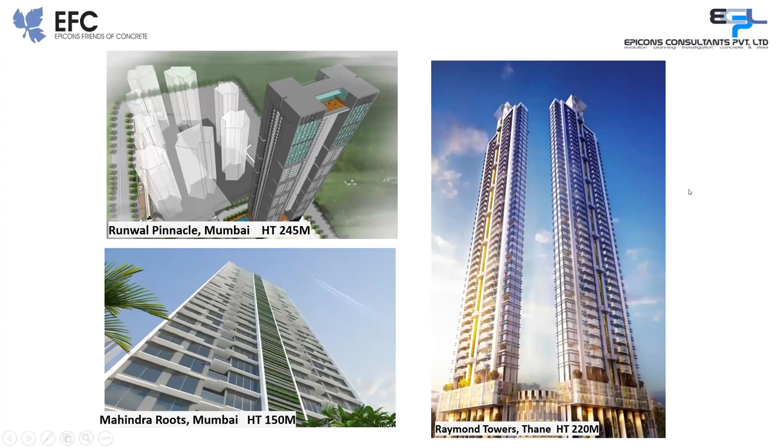He is involved in design of more than 75 tall structures ranging from 100 meter to 250 meter height for leading developers. He is a member of American Concrete Institute. These are glimpses of his projects: Runwal Pinnacle, Mumbai; Mahindra Roots, Mumbai; Raymond Towers, Thane.

Our second moderator, Engineer Arvind Parulekar. He is BE Civil from SPC, Mumbai University in 1987. Further, he pursued Masters from MS University, Vadodara in 1990. He is working with Epicons Consultants since 1989.

He is Director at Epicons Consultant, handling NDT and Structural Assessment Department. He has conducted training programs on NDT for PWD MERI Nashik, ISSE Mumbai, PWD Mumbai and Thane, CIDCO Navi Mumbai, and of course many webinars of EFC.

He was appointed auditor by RMCMA for RMC 2010 and 12. He worked on more than 2,500 projects, including structural assessment projects, large volume NDT projects, complex challenging structural design projects, and infra projects. Recently, he has completed the large industrial complex assessment at Philippines. He has developed an in-house well-equipped NABL accredited lab with a team of 35 engineers and technicians.

Now I request Parulekar sir to give the preamble.

Good afternoon, friends. Welcome to webinar 143, Earthquake Resistant Designs of High-Rise Structures: Modeling, Analysis and Design, by Professor Dr. Yogendra Singh, in which he will also have special emphasis on buildings with vertical irregularities.

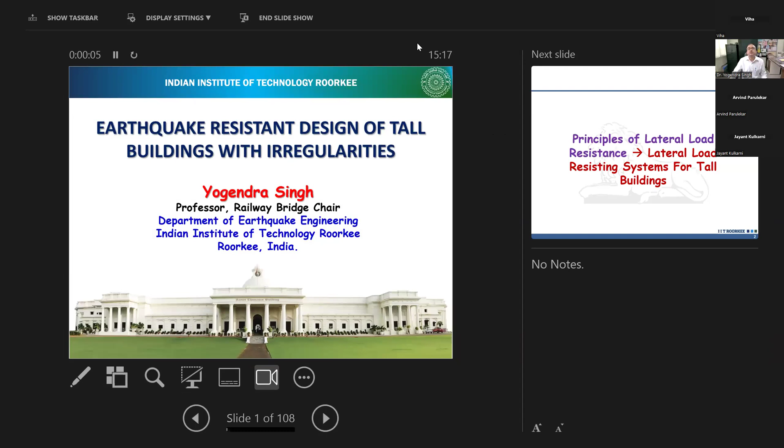Yeah, so it should be clear now.

As Mr. Parulekar has introduced, today we will talk about earthquake resistant design of tall buildings, with focus on irregularities. So the common irregularities, mostly vertical irregularities, and also some of the common irregularities which we are struggling with most of the time in actual design.

Our code defines an irregularity in terms of mode shapes, where we have to satisfy some criteria regarding the periods. We will also talk about that.

I will also talk about torsional irregularity a little bit, and floating columns, which is considered to be a big problem. In many cases, we have to provide floating columns or floating walls. And what should we do in such cases?

And also the infills, the masonry infills, those are always present in our buildings in India, and we are always worried about whether those are causing any stiffness or strength irregularity.

So before starting, I want to talk a little about principles of lateral load resistance. Buildings are subjected to vertical load, dead load and live load, and lateral load, that is wind load and earthquake load. Vertical load we encounter during our day-to-day life, and we understand the behavior of the buildings mostly under vertical load.

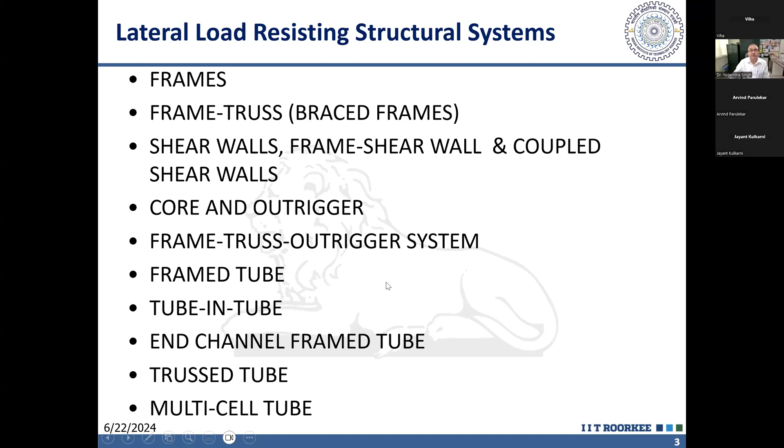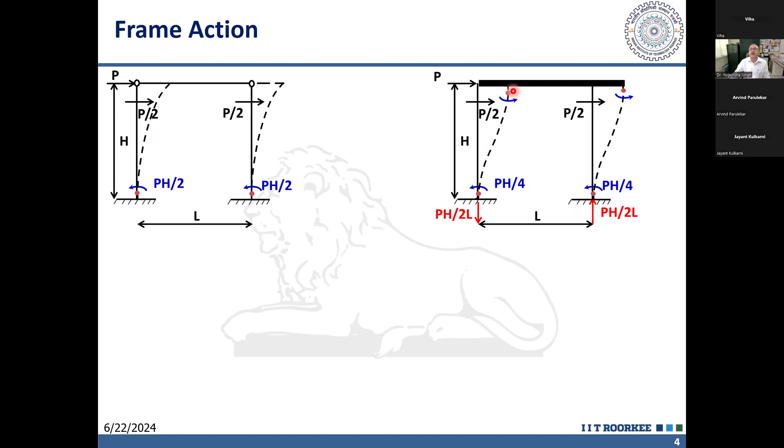Connection between the beam and column here is made by making the beam infinitely rigid. But in real practice, we can't have the beam infinitely rigid. So the beam is also deforming, and due to this deformation of the beam, the bending moment in the column is not PH by 4, it is more than that. It is somewhere in between.

These two cases represent extremes. Real frames with real beams and columns are somewhere between these two extremes. The moment reduces, and part of the force is resisted through overturning.

So one of the columns is subjected to compression, another column is subjected to tension, and similarly in the real frame also there will be some reaction. That reaction will be less than PH by 2L, but still some compressive force and tensile force will develop in the columns, and as a result this system will be able to resist more force, because part of the force is being resisted through axial action.

And from our day-to-day experience, we know any member is more strong, and not only strong, more stiff also, in axial action than in bending action. As a result, the rigid jointed frame is a more efficient system in terms of stiffness as well as strength.

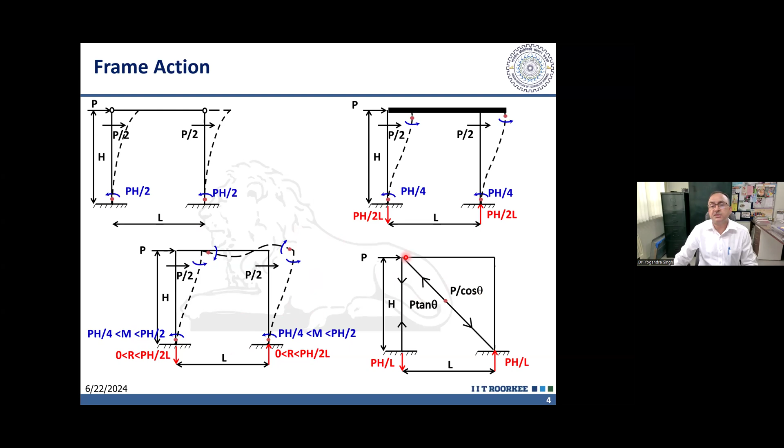Now we can further improve the stiffness and strength of the system by providing a brace here, a diagonal member. So when we provide this diagonal member, then this behaves like a truss, and all the force is transmitted through axial forces, or I can say that most of the force is transmitted through axial forces.

So even if this beam to column junction is rigid, very little moment is transferred to the beam, and from equilibrium, little moment is transferred to the column, and almost all the force is transmitted through axial action, and the performance improves further. Although the strength and stiffness of the braced frame increases, its ductility is reduced.

So we have to understand that the members, whether RCC or steel, are much more ductile in bending, but those are not ductile in axial action. That happens in case of steel also, and that happens in case of RCC also.

In steel, the problem is buckling, because when this member yields in compression, we have to understand that earthquake force is much larger than the capacity; whatever structure we are designing, the earthquake force it will attract will be much more than its capacity, and as a result it has to yield.

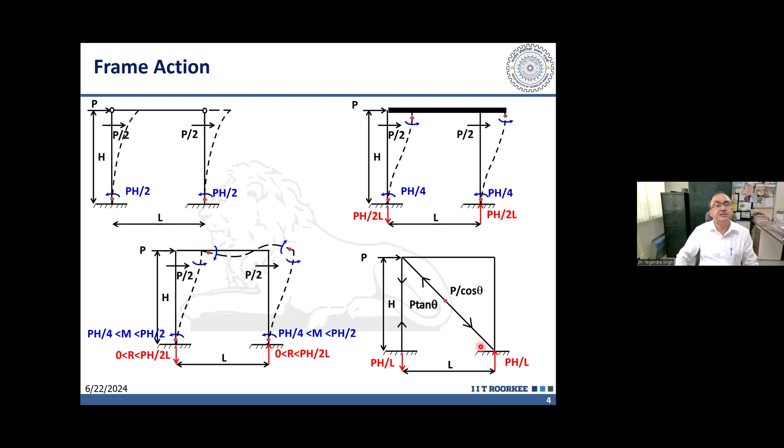And when this brace yields in compression, it buckles. As a result, if we compare the load displacement curve of these two systems, one is the rigid jointed moment frame, another one is the brace frame.

So in the moment frame, we can see that strength, stiffness as well as ductility we get. Whereas in case of a brace frame, especially in compression, when the buckling starts, just at the yielding, the buckling starts. Even if we have designed this brace member with the L/r ratio within the limits, so slenderness is controlled, even then when it will yield, its effective modulus of elasticity, the tangent modulus, will be zero.

And because of that it will buckle. Its buckling load will drop, and as a result you can see that just at yielding it will suddenly lose its strength, and as a result its ductility will reduce.

So to combine the ductility and stiffness of the brace frame with the moment resisting frame, we have eccentrically braced frames where we combine the two. That can be done in case of steel structures.

In case of RCC structures, if I have to enhance the capacity of a frame, I can do that by replacing the columns with a wall. So what we are doing with the same material, same amount of concrete which I was putting in these columns, which may be square or rectangle, I put in an elongated shape.

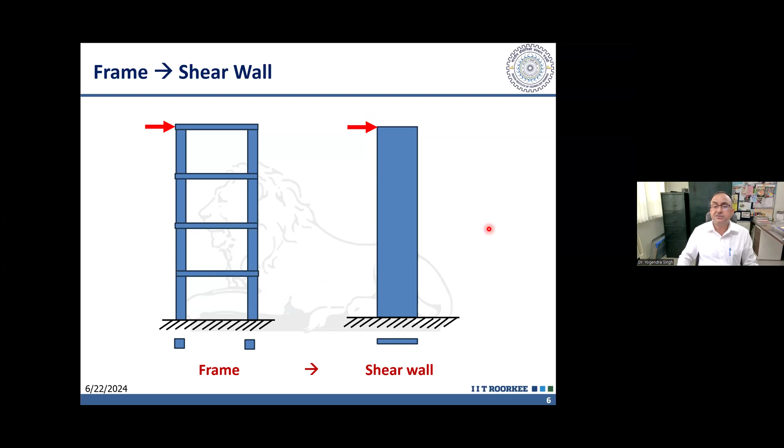Now, when we are using frames and shear walls together, we have to be careful. There is a difference in the deformed shape of the frame and the shear wall. The frame deforms like what we call a shear beam.

So actually this deformed shape is that of a shear beam. And because of the lateral load, the shear force goes on increasing. The story shear in the top story is the lowest, and as we go down towards the base, shear is maximum, and as a result the slope at the bottom is maximum, and as we go up the slope goes on decreasing, and in the top story it becomes almost zero.

On the other hand, in case of a shear wall, it behaves like a cantilever beam, flexural action. So the moment at the base is maximum, but the slope is zero because of the boundary condition. So we get the maximum curvature, zero slope, and that curvature goes on accumulating along the height. So if we integrate that curvature, putting the boundary conditions of slope equal to zero, we can see that the slope at the base will be zero, but the slope goes on increasing along the top.

So in case of shear wall, the maximum slope will occur at the top, whereas in case of a frame, the interstory drift will be minimum at the top.

And when we combine these two, we can see that there is a push and pull between these two systems. In the bottom portion, the shear wall is supporting the frame, and in the top portion, the frame is supporting the shear wall. Due to that, there is a complex interaction, a change in the forces, which is known as frame shear wall interaction.

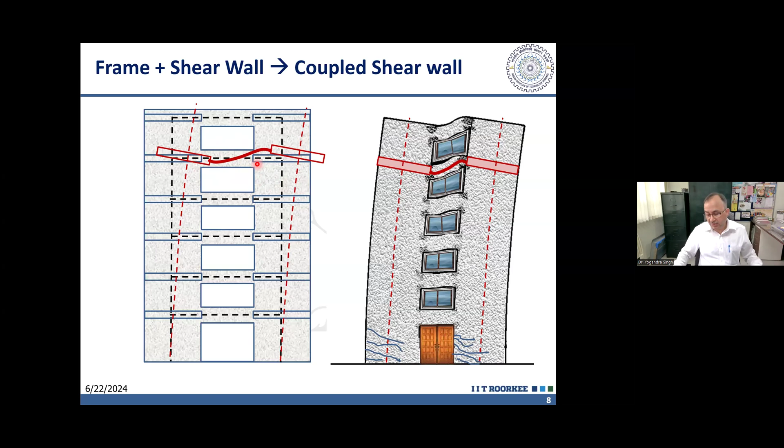So we want any RCC member to yield in flexure as far as possible. But in case of coupling beams, if we make these beams too slender, we will not get the advantage of stiffness of these two shear walls. And if we make them deeper, as generally we do, these deep beams will act as short beams and failure will occur in shear. So we have to be careful that these beams are designed for very high shear, and that's why the code has the requirement of providing diagonal reinforcement in the coupling beams.

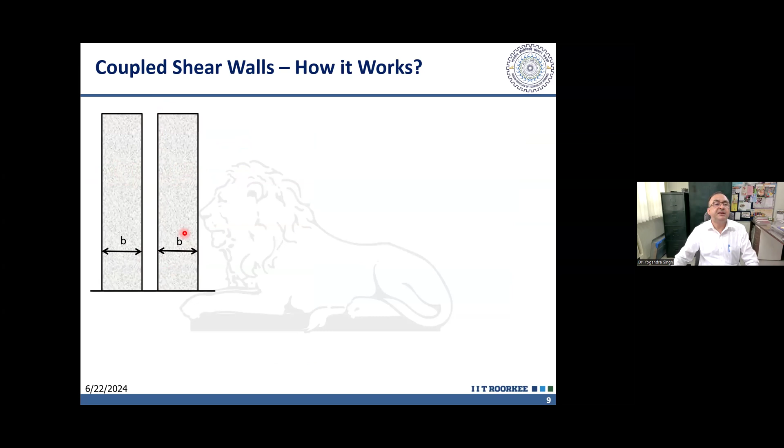So how does the shear wall work? We can think of the shear wall as two shear walls. If these two shear walls are fully separated, with the beams between them either absent or very slender, they will act as independent walls, and the total moment of inertia will be the sum of the moment of inertia of these two shear walls. This will be 2 into T B cubed by 12, where T is the thickness and B is this length. So this will be 2 times the moment of inertia of the individual walls.

Now imagine I join these two shear walls together, somehow welding them at this junction. Then this will act as one shear wall, and the moment of inertia will be T into the cube of 2B divided by 12. That becomes 4 by 6 T B cubed — in other words, the moment of inertia, stiffness, or strength of these shear walls is going to increase 4 times.

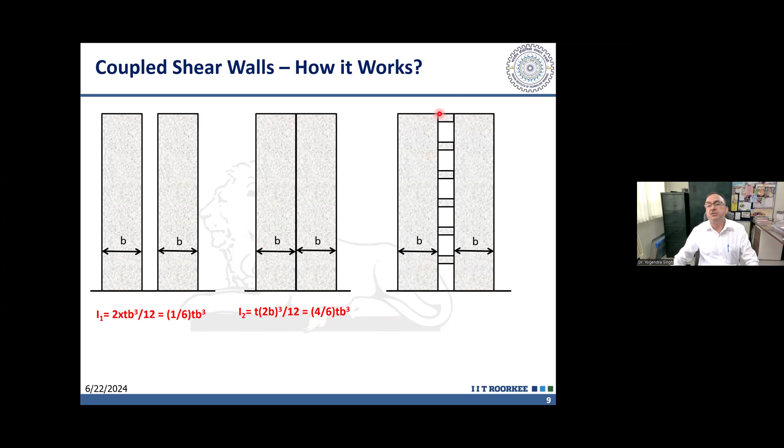Now, this type of connection is not possible, because in that case it will become one shear wall, and generally we need openings in between. So what we do is join these shear walls with coupling beams. When we join them with coupling beams, the behavior is somewhere between these two extremes — one extreme being fully separated, the other being connected together as one integral wall. This is somewhere in between, and how much interaction takes place between these two shear walls depends upon the stiffness of these beams.

If these beams are stiff and strong, there will be larger stiffness and strength of these shear walls, more than that of two shear walls put separately. We can see that the moment of inertia will be somewhere in between these two, and accordingly the stiffness and strength will also be in between. So this is another very important system which we are using, and most of our buildings in the mid-height range, 20 to 40 story buildings, mostly have this type of system.

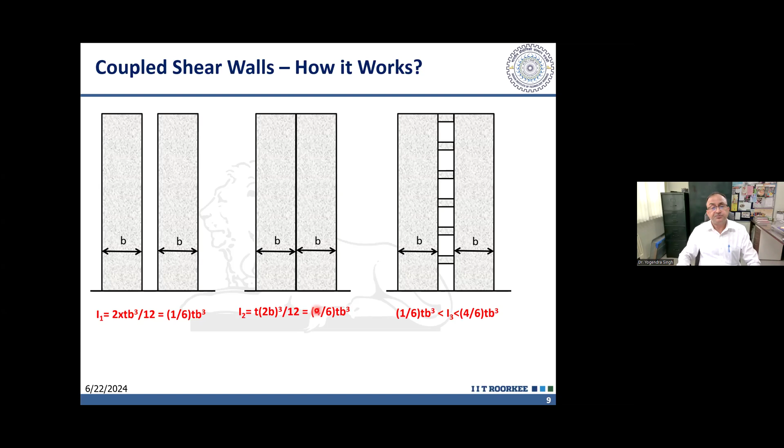Now, the performance can be further improved if we can transfer some bending action of the shear wall to the axial action of the column. And that we can do with what we call the core and outrigger system. So suppose I have a shear wall core at the center, and along the perimeter I have columns. If it is connected through slab, the slab is going to deform like this. Even if it is connected through slender beams, those beams will also deform like this. As a result, some axial force will develop in the columns, but that axial force will be limited.

If somehow I connect these shear walls to the columns through a rigid member at the top, then when the shear wall bends, the section which is perpendicular to its bending axis will rotate — it will try to compress the columns on one side, and it will try to extend them on the other.

It will try to put the column on the other side in tension. As a result, some overturning moment, which was resisted earlier by the shear wall alone, will also be resisted by these columns through axial action. And as we convert bending action to axial action, we discussed that it makes the system more efficient.

So we will be able to achieve higher strength and stiffness if we use this action. But we have to keep in mind that when we are subjecting the columns to high axial force, we are compromising their ductility, so their energy dissipation capacity is compromised. We have to ensure that the column should be strong enough, the column should not fail, and the energy dissipation should take place through beams and shear wall at the base.

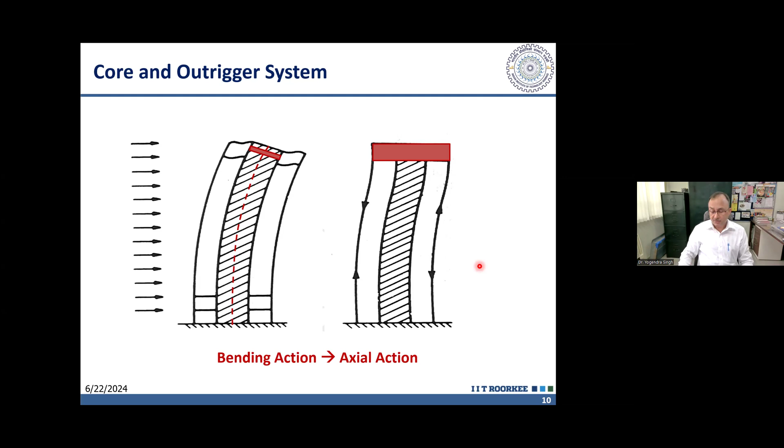Different types of these core and outrigger systems are possible, and some people have also used energy dissipation devices between this core and outrigger, because this core will be subjected to large bending, especially at the top. The rotation will be maximum, and due to that, there will be large relative displacement between the shear wall core and these perimeter columns. If we can put any energy dissipation device there, we can dissipate a lot of energy through this supplemental device. So this type of arrangement is also proposed. This is the most desirable location where we can put dampers for dissipating energy in case of a tall building.

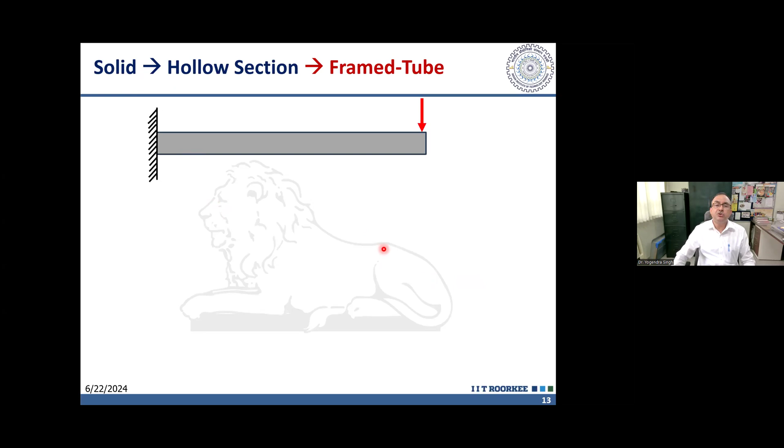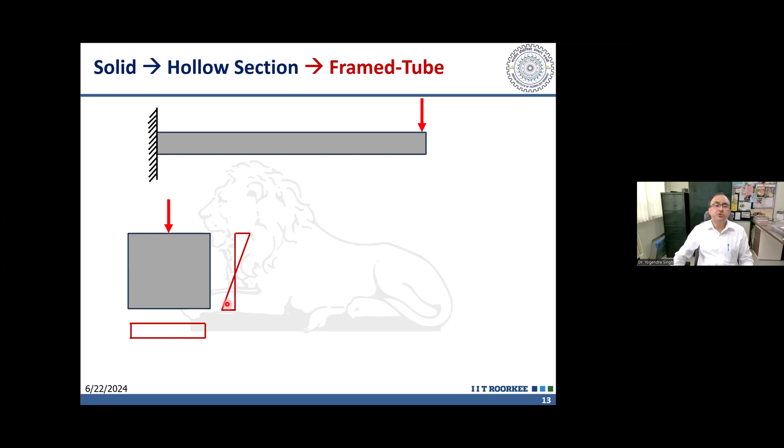Now, another principle which we use in enhancing lateral load resistance of our buildings is moving from a solid section to a hollow section. Suppose this is a cantilever beam. In one case, it is having a solid section and it is subjected to vertical load here in this direction. If I plot the distribution of the stresses, we know bending stresses are tensile at the top and compressive at the bottom, and those are increasing, varying linearly till the material has not yielded.

And in the linear range, this is going to be the distribution of the stresses. I can enhance the moment of inertia of this cantilever beam significantly by making a hollow section made of the same material, so the total amount of material or the area of the cross section remains the same. Only thing is that I have arranged that material in the form of a hollow tube. When I remove the material from the center and put it along the perimeter, its lateral load resistance increases significantly because the moment of inertia about this axis increases.

But along with this increase in the moment of inertia, there is also a problem because of the thin sections. Now, it is not a solid section, it is a tube where the webs and flanges are thin. There is a phenomena of shear lag, and due to that, this stress distribution, which was earlier linear, is no more linear. Rather, the stress near the corners is higher and it diminishes rapidly as we go towards the center.

So earlier it was varying linearly, now it is varying parabolically, and it reduces much faster. Similarly, on the compression and tension face, the stress was constant earlier — the bottom fiber or bottom face was having the same stress throughout. Here it will not remain the same throughout, again because of the phenomena of shear lag due to the thin section. So maximum stress will occur near the corners, and as we go towards the center, this stress is going to reduce. So we can enhance the capacity of a solid section by putting the material in the form of a tube. Its stiffness and strength is going to be enhanced, but we have to keep in mind that this phenomena of shear lag will take place. It will reduce its efficiency to some extent, but still it is having much more resistance than a solid section.

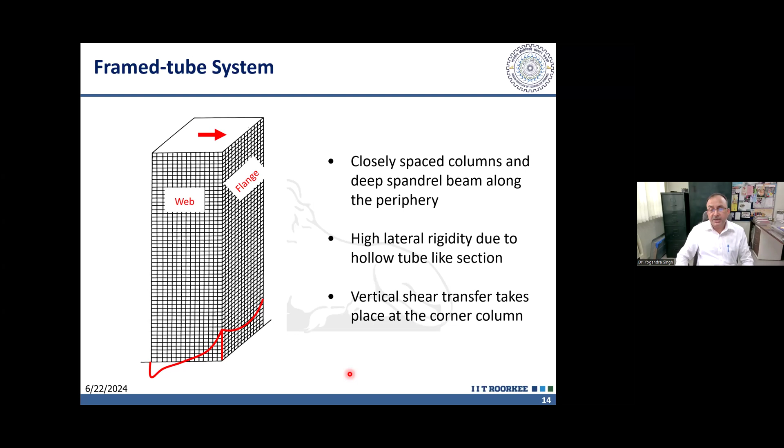So this shear lag phenomena reduces the efficiency of this frame tube system to some extent, but it is still a very effective system in RCC as well as steel buildings, and many past buildings have been constructed using this. Now we have to keep in mind that when we look at the structural systems of tall buildings constructed in the world, we see different structural systems have been used. It's not that any particular system has been used for all buildings - this frame tube has been used in many buildings, but not all. Other buildings have been constructed with other structural systems, which we will talk about too.

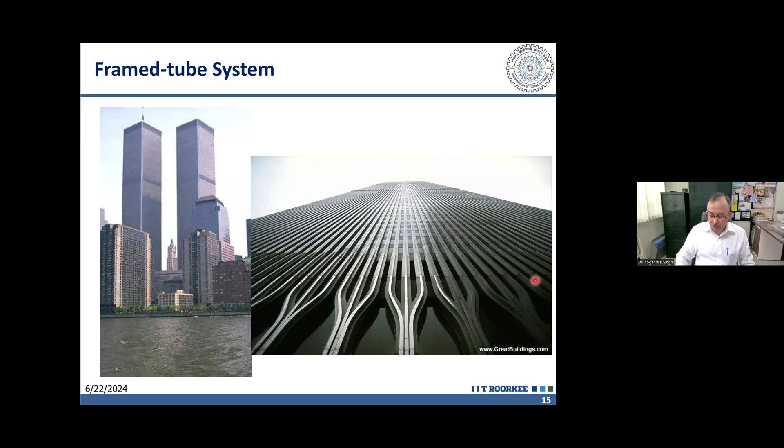So what we see here are the World Trade Center Twin Towers, which were destroyed in the terrorist attack, as all of us know. This was a steel tube - once upon a time the tallest building - made of steel tube. You can see closely spaced vertical columns connected by deep beams. At the bottom, because of architectural reasons, the spacing between columns was increased, columns were made much stronger, and a transfer girder was provided at that level. We will talk about the design of the transfer girder later.

Now another system, an improvement above the frame tube, where we provide a shear wall core. In a tall building, there will be a large service core, which will have all the services - staircase and elevators and lifts, not escalators. So we can have a large inner core housing all these services, constructed with shear wall, because such ventilation may not be needed as in the rest of the building.

So the outer tube may be made of frame tube, and the inner tube may be made of a shear wall. This system we call a tube-in-tube system, and it will have a behavior something similar to frame and shear wall.

So it is also a coupled system, and similar behavior, similar type of interaction between the inner core and the outer core we expect here. But a combination of the two makes this much stiffer, and we can go for larger heights.

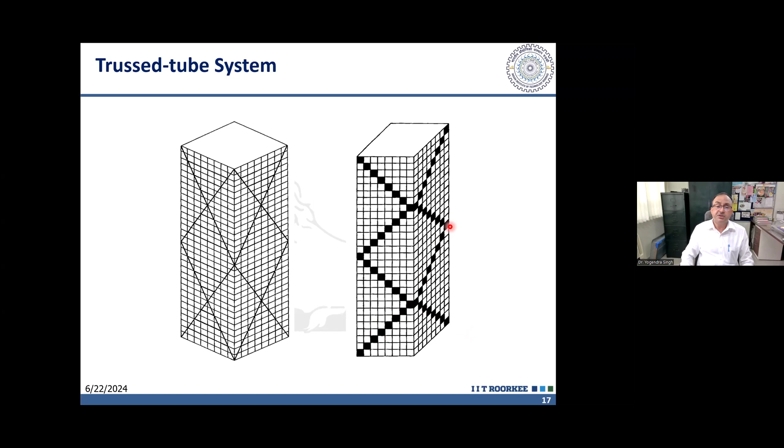Now, to minimize the effect of shear lag, another system called bundled tube or multi-cell tube is developed, where multiple tubes are bundled together. Or we can think of this as a frame tube having multiple bays.

So several bays are there, and due to that, at the intersection of the bay and the frame, along these columns the forces will increase almost to the same level as the corner columns. So here also the forces will increase, and shear lag will take place between these two columns, and due to that the efficiency of the system will increase.

So these different types of systems can be summarized like this, and this figure shows the tentative height range. As I said earlier, there is no rigid rule about the height that each system can go up to, but the height range in which different structural systems are economical is given in the textbook. I think I have taken this from B.S. Taranath's or maybe Fintel's handbook, I don't remember which of these two books.

So we can see that up to 10-15 stories we can have a semi-rigid frame. Then for taller buildings we can go for rigid frame, then braced frame. And you can see here these are not concentrically braced frames, these are eccentrically braced frames, because concentrically braced frames lack ductility, so eccentrically braced frames are preferred.

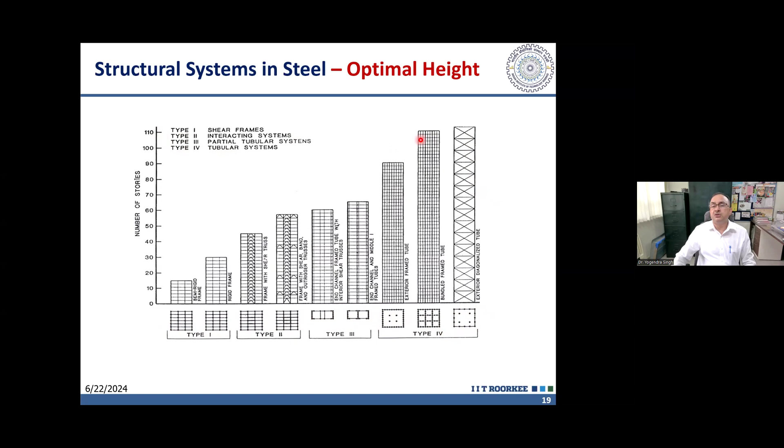Now, similarly, in case of RCC buildings, we have the rigid jointed frame. We can go theoretically up to 20 stories, but usually up to 10 stories. Beyond 10 stories it becomes difficult to satisfy the interstory drift.

Theoretically, it is possible to go as tall as we want. We have the frame and shear wall system, and the shear wall system alone. The frame-shear wall dual system is more efficient than the shear wall system alone, and it is suggested for up to 50 stories. Then we have frame tube and tube-in-tube systems, where the inner tube is made of shear wall core, along with modular tube, multi-cell tube, or bundled tube systems, where we can go even taller. These are the structural systems for RCC buildings, and we can see that efficiency increases, allowing us to go taller.

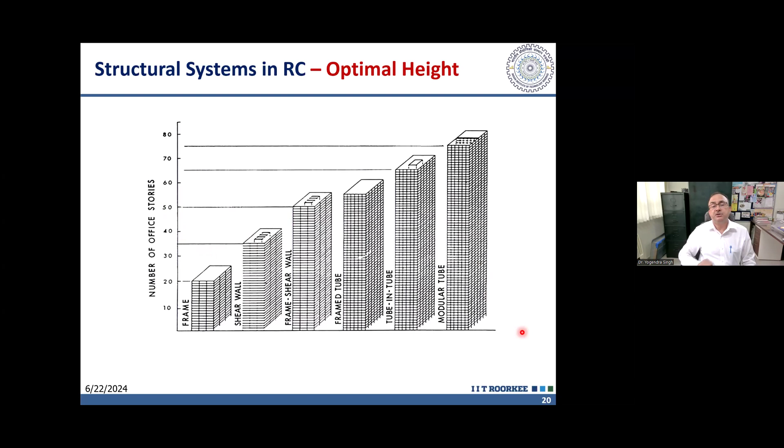But these limits are only tentative, defining which system is more efficient. It doesn't mean that if you choose a system that is less efficient, it may not be economical, but there is no limit stating these heights must be treated as absolute limits. But in our code, IS 16700, there are rigid limits.

That's why in zone 4 and 5, in tall buildings, frames are not allowed. But in zone 2 and 3, where earthquake forces are smaller, these are allowed, and up to 80 meters is allowed for frames alone - 80 meters, not 80 stories. The building is allowed to have frames alone up to that height.

When we have a well-distributed structural wall system, we know this is a more efficient system, so in zone 5 we can go up to 120 meters. If we have a structural wall plus moment frame, we can go higher, and the same is applicable to structural wall plus perimeter frame. Similar limits are given in our code for these combinations. But when we have a frame tube, that frame tube may have an inner tube.

The structural wall can be in the form of an inner tube, which is more desirable and common from the functional perspective. Otherwise, it can be a distributed shear wall along with the frame tube. The code allows up to a maximum height of 180 meters in zone 5, and up to 250 meters in zone 2.

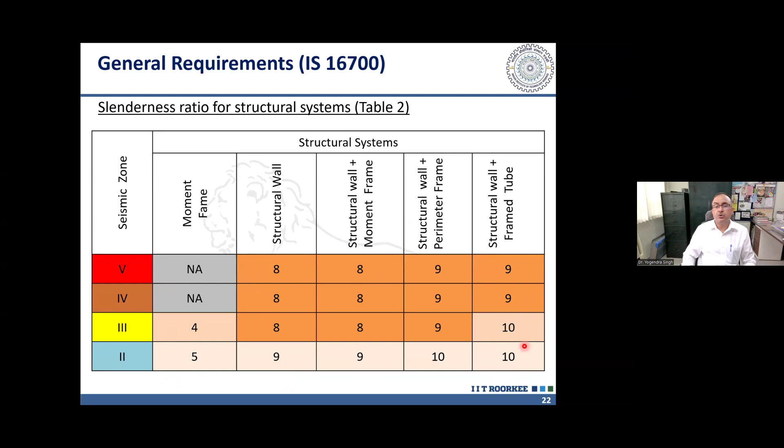But if we can provide proper design of the foundation, and check that our columns still have significant or desirable ductility, we can go beyond this limit. Such buildings we call code-exceeding buildings, and we can justify their design using appropriate methods, such as performance-based design or nonlinear analysis. Based on nonlinear analysis, if we can demonstrate the building's performance is okay, we can go beyond that as well.

Now the most common type of system which we have - somehow this black strip is coming on my screen. Is it coming on your screen also, or are you seeing it clearly? No, we are seeing it clearly. Okay.

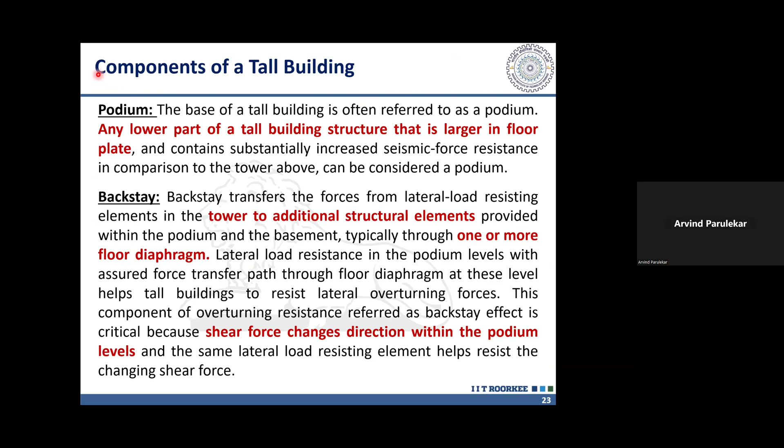Our common tall buildings constructed these days have a tower, a basement, and sometimes a podium above the basement. This podium is a larger structure at the base, and if there is a basement, we will have retaining walls. That makes it very rigid and creates the so-called backstay effect, causing the most common type of irregularity in our buildings, where the bottom is very stiff. Although it is not defined as irregularity, it poses challenges in analysis and design.

There can be a basement with a single tower or multiple towers, and the stiffness of the tower and the basement is very different. When we perform modal analysis or free vibration analysis, the initial modes do not have mass participation from the basement. As a result, you will not get 65% mass participation; it will be much less. If you want 65% or 90% mass participation, you have to consider a large number of modes, more than 200 or so, depending on the difference in stiffness between the two systems.

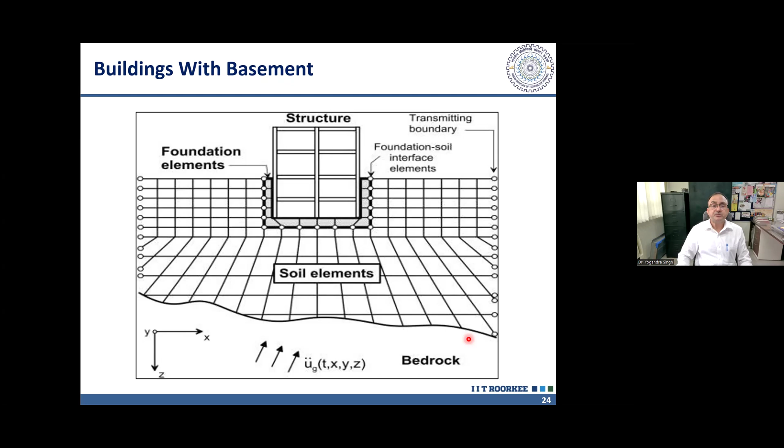So what we do is take into account the load part. When we have a podium with a shear wall, or a basement with retaining walls, these retaining walls also act as shear walls in plane and out of plane direction, subjected to earth pressure. This bottom portion becomes very rigid, and when the tower vibrates at the topmost level of this podium, it is subjected to reactions here. As a result, a large shear force gets transferred from the tower portion to the podium or basement portion, and this top slab, through which the shear force transfer takes place, we call the backstay.

And this phenomenon we call the backstay effect. This backstay effect changes the distribution of bending moment and shear force within the core.

If we look at the distribution of the load, this triangular load acting, let's say due to earthquake, increases linearly - actually in proportion to the mode shape, but let's assume linear increase. As a result, it gets transferred into the shear wall. At the top of the podium, where we have this backstay effect, the deformation becomes almost zero or reduces significantly. This is the deformed shape of the core or the tower, with maximum deformation at the top. Near the backstay, the displacement is almost zero because of the rigidity of the backstay.

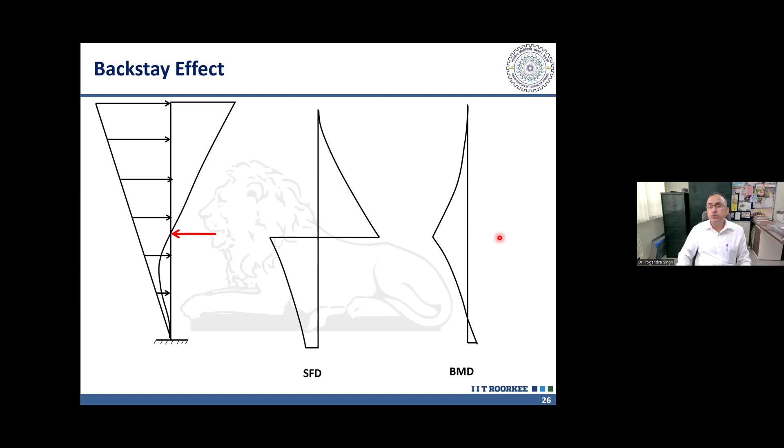So this phenomenon we have to properly simulate. Whichever model we are using should be able to simulate this. Two approaches are used for that, depending on the stiffness of this backstay and what rotational stiffness we are getting at the base. Our structural system can be idealized like a cantilever connected by a spring, and this spring represents the stiffness of the backstay. Depending upon the size of the retaining wall, this backstay stiffness can be anywhere between 0 to very large, close to infinity, where the displacement here is 0.

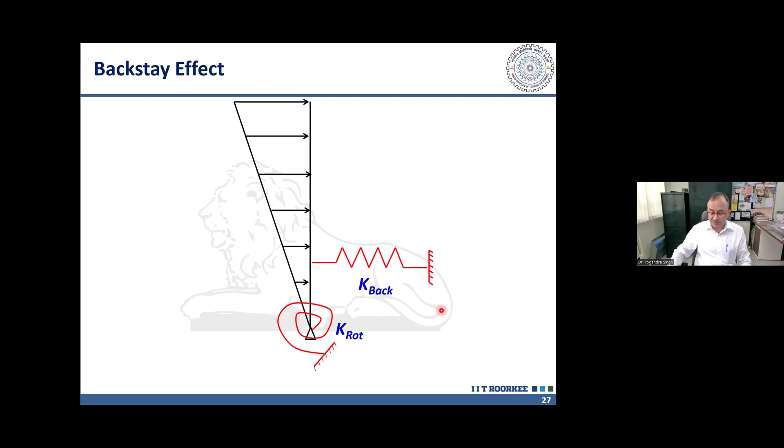And the rotational stiffness will be provided by the raft foundation present at the base of the basement, or the founding level. So this rotational stiffness will come from there. Depending on how much stiffness is mobilized through this backstay, the behavior of the structure will depend.

During large forces like earthquakes, the backstay slab, the top slab of the basement or podium, will yield locally, and due to that its stiffness is going to change. So estimation of the exact stiffness available during an earthquake is difficult, and that is why the code suggests a sensitivity analysis, where varying stiffness of the backstay are considered.

So two approaches to consider this effect, or modeling of tall buildings or the components of tall buildings, are there: one is the skeletal approach, and another is the continuum approach. Some of the members in tall buildings have distribution of mass along a line, which can be represented by a line. We call those the skeletal elements, and examples are beams, columns, braces, trusses, and in some cases shear walls.

I will explain that the shear wall can also be modeled as a skeletal element using a frame element, or using a line element, and we do the frame modeling using skeletal elements. On the other hand, we have different types of continuums, 2D and 3D. 2D continuums are those where the mass is distributed in two directions, like shear walls, slabs, and foundations.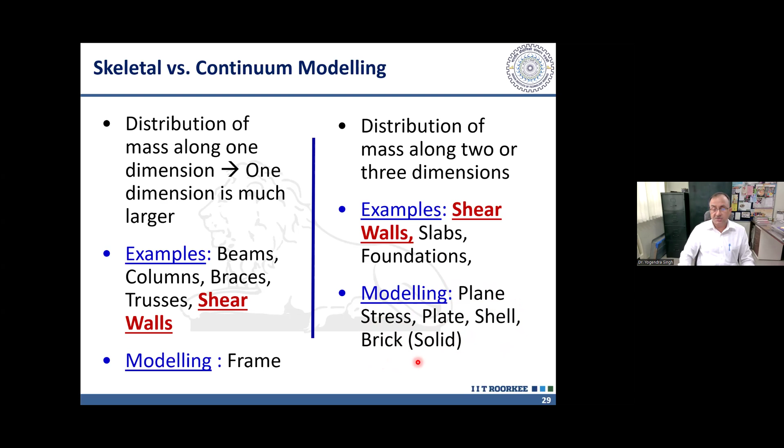So the web is represented by one frame member. The flanges are represented by separate members, and these members are interconnected through rigid elements. If we connect them rigid, then we can mobilize the action due to the C-shaped shear wall.

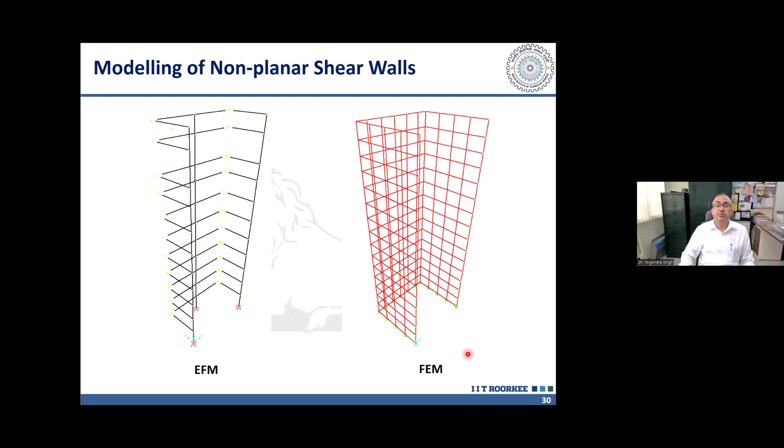That's why frame modeling, where we represent shear walls with a single column, a wide column, or multiple wide columns, is more desirable.

Here a frame element is shown for this shear wall core. We can see the shear wall consists of 2 C-shaped portions. We have RC walls here in the form of C-shape, and here in the form of C-shape, and then they are interconnected by coupling beams.

We can model this by frame elements, by providing one column here, one column in the center of this web, and another column here. So 3 columns represent one C-shape, and another 3 columns represent the other C-shape, and these are interconnected through beams.

These 3 columns will be interconnected by rigid elements. This black horizontal element I am showing is nothing but the rigid beam, so these columns will be interconnected by rigid beams, and in between they will be connected by the actual beam, the coupling beam. This thin line here is the actual beam, with the dimensions of the actually provided beam.

Those columns will be interconnected through rigid beams, meaning their stiffness is much higher than normal beams. If the stiffness of these beams is at least 100 times that of the actual beams, if we provide stiffness 100 to 1000 times, the purpose is served. We cannot provide stiffness lesser than 100 times, because then this will not behave as rigid, and these 3 columns will not be properly integrated together.

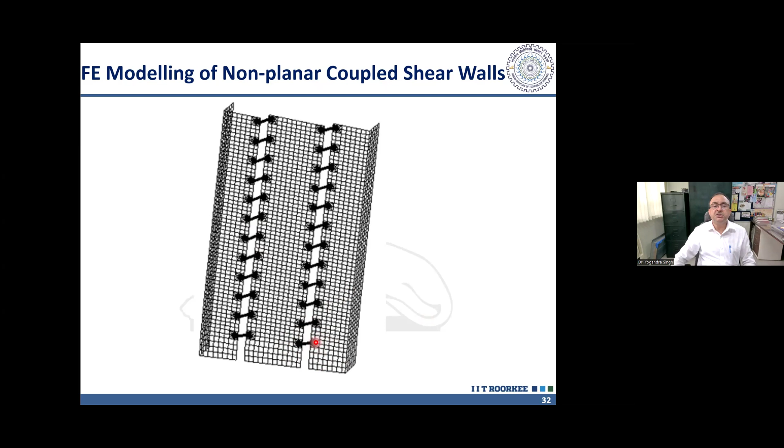So two approaches are suggested to take care of that, so that this end of the beam is not connected to one member, one node alone. It is interconnected with nearby nodes also through rigid elements, so that provides sufficient rigidity at this connection.

Or alternatively, we can provide fictitious beams here. So in the shear wall, there is no beam actually, but we can provide a fictitious beam here, which is rigid, and then our normal beams we can connect with this. In that case, the connection between the shear wall and the real beam will be quite rigid through these fictitious rigid beams, and these rigid beams will have the same stiffness as I said earlier.

So although there is no beam provided here, just to make the connection, that beam may be a coupling beam, or that beam may be the beam coming from the frame and connected to the shear wall here. So it is good to have a fictitious beam here, and that beam is rigid. In that case, the connection between the shear wall and the beam will be established as a rigid connection.

So just to show you an example, this is a 20-story building, which is having shear walls along the perimeter, and there are 4 columns at the center. So the lateral load is resisted mostly by these shear walls, and very little force is resisted by these columns.

But just to give you an idea how the modeling can affect the results, or how much our results are sensitive to the modeling, 4 types of models are shown here. In the first case, the shear wall is also modeled using shell elements. The slabs are also modeled using shell elements, with a meshing of 10 by 4.

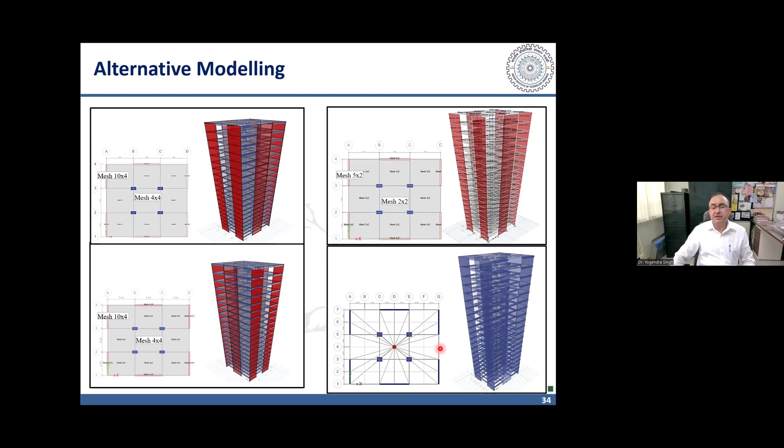And if you see the results of these 4 models, first the periods - you can see that the periods are close, but model 2 is getting a larger period, slightly longer period, and all other models are close to model 4.

So model 4 is the one in which we have modeled the shear walls also as wide columns, not using shell elements. So you can see that the period is very close, almost the same, and the slabs have been modeled as rigid, because we were having a solid slab, there was no opening, no cutout in the slab, so we could model that as rigid diaphragm.

So all the slabs have been modeled as rigid diaphragms, and the shear walls have been modeled as frame elements, and we can see that the periods we are getting are very close. And if you look at the base shear, that's also almost the same. Mass participation ratio, all the parameters have been compared, and we can see that this model, which is very light and simple, gives us the same results as we are getting with finite element models, as far as the tower portion is concerned.

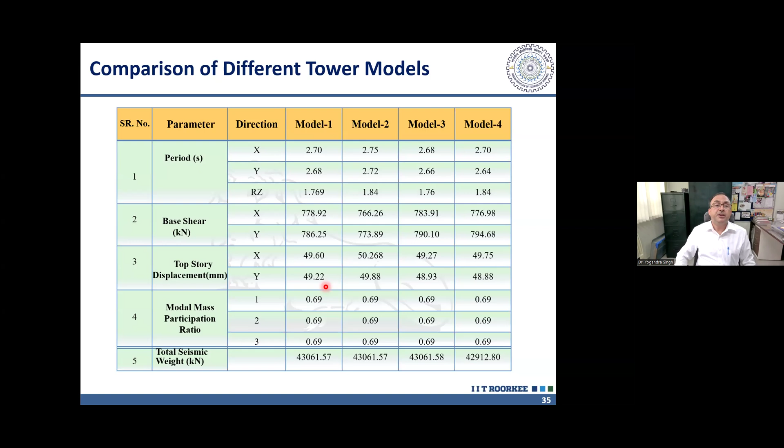So we have to keep in mind this is applicable for the tower portion. Now we have the basement also. So when we are analyzing the building with a basement, then two approaches are possible.

In the first approach, also called the substructure approach, we model the tower and basement portions separately. The tower portion can be modeled using any of the four models discussed earlier. The basement, which has retaining walls, is modeled using shell elements. The portion of the tower going into the basement can be modeled in the same manner as the upper portion above the basement.

So the tower portion is modeled and analyzed separately, and the basement is modeled and analyzed separately. Whereas in the second approach, we make a single model of the tower and basement, a coupled model. This is also called the coupled approach.

Here the tower portion again can be modeled either using wide columns and frame elements, or using shell elements. Whereas the basement portion, the outer retaining wall of the basement, is to be modeled using shell elements.

Now the problem with the coupled model — why approach one is to be used — one reason is that when we analyze two systems separately, the computational time is reduced. But more than that, there is a problem in scaling of the base shear.

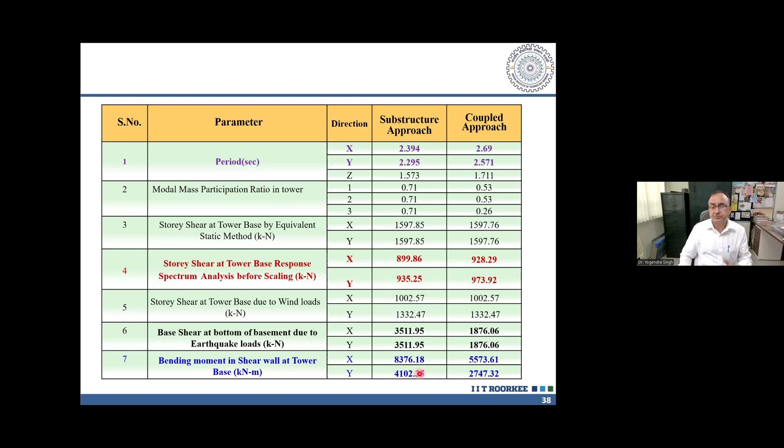So this substructure approach is conservative in all respects.

Now we can also have a look at the modal characteristics. In the initial modes, only the tower portion is participating, and that's why the mass participation is small. We get only 53% mass participation in the fundamental mode, which is quite small. In the second mode, we get similar mass participation in the other direction.

If we consider the first three modes and look at the Codal requirement, 65% mass in each direction has to participate in the first three modes. We can see that we do not get that. But we have to keep in mind this is not because our building is irregular. This is because the building has a basement, and a lot of mass is concentrated in the basement, and that portion is not participating in the initial modes.

Basement participation comes in the 42nd mode, and it is also 3.8%. In the 47th mode, it is roughly 10%. So only at very large modes do we get participation from these higher modes, and we reach close to 99% participation at 300 modes. Even up to 47 modes, our total mass participation is only 88% in the x direction, so even 47 modes are not adequate because our basement is participating here.

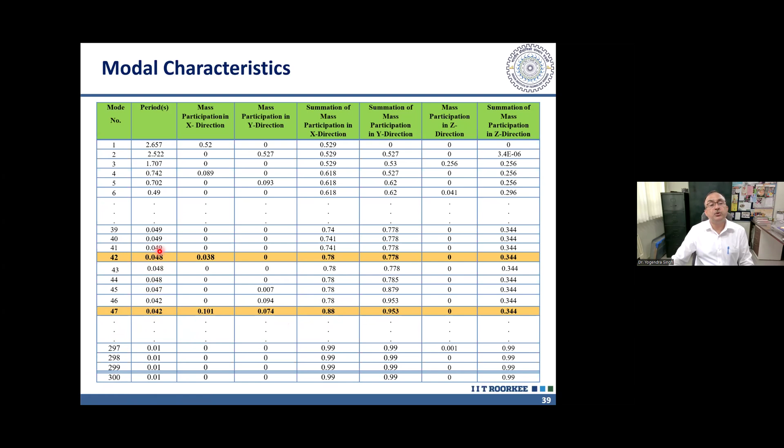If you look at the period in these modes, it is only 0.048, less than 0.05, so much less than 0.1. And if you look at the shape of the response spectrum, it is in this range where the normalized response spectrum is increasing from 1 to 2.5.

In the decoupled approach, we have assumed the basement to be infinitely rigid, and we have assumed that the period will be in this range, and SA by G we have taken as 2.5, whereas in reality it is in this range, and that's why the second approach is giving us lesser base shear.

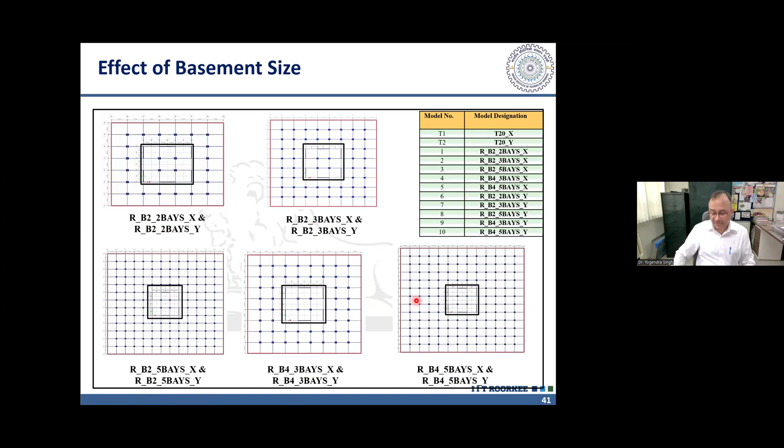As we increase the size of the basement, and if we look at the period: T1 corresponds to the tower portion, the fixed base model, whereas B2 and B4 represent the 2-story and 4-story basement, and these are the number of bays. So we can see 2 bays, 3 bays, 5 bays outside the tower portion, so the size of the basement goes on increasing.

If you look at the period of vibration in different directions, the shortest period we get is in the fixed base condition. As the size of the basement goes on increasing, the period elongates slightly because this basement is providing some flexibility, and the larger the size of the basement, the more flexibility it provides.

If the basement is smaller, close to the tower, the flexibility provided will be less, and the flexibility will be more if the depth and plan area of the basement is increasing. So we can see that the period of vibration is increasing, and the basement is participating in these modes. As the basement is smaller, it is rigid, its participation is smaller, and that participation comes in a higher mode. If the basement is increased in size and depth, its participation increases and starts occurring at a smaller number of modes.

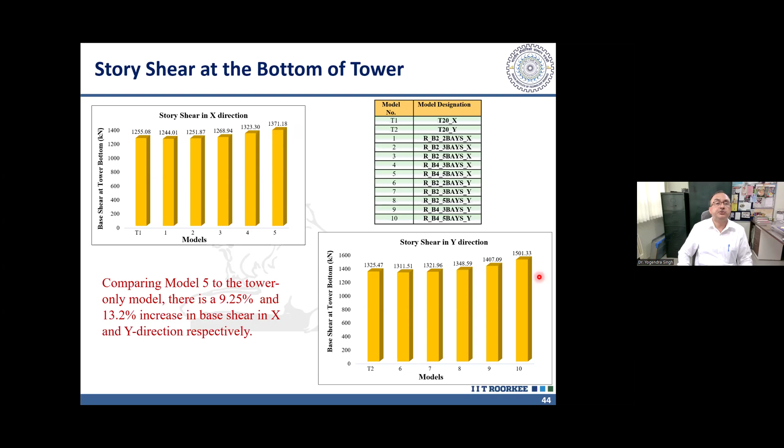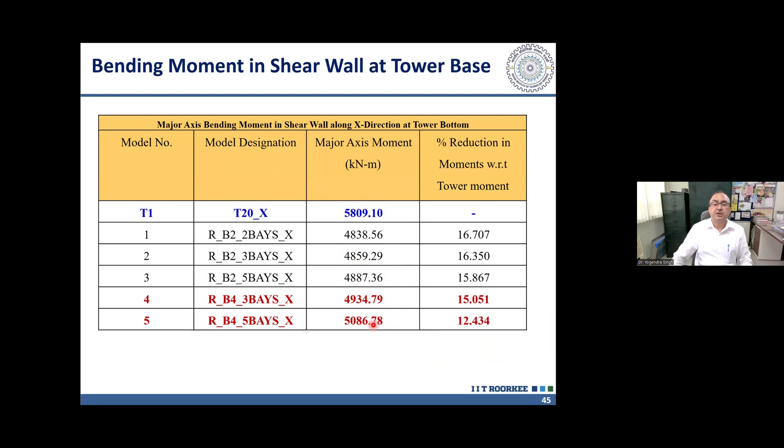This is the bending moment in the shear wall. We see maximum bending moment in case of fixed base, because there the shear wall is assumed to be fixed. As the size of the basement increases, the moment occurring in the shear wall goes on increasing, but in all these cases the difference is not very large. Same happens in X direction and in Y direction.

Then backstay sensitivity, which our code is asking about. We can model the slabs of the tower portion using rigid diaphragm if the slab is solid. That saves a lot of degrees of freedom, reduces the size of the problem, and computational time will be reduced. But in the basement portion, we cannot use the rigid diaphragm command. There we have to model the slabs using shell elements and use stiffness modifiers.

A stiffness modifier of 0.25 is suggested in general. Our code suggests a stiffness modifier of 0.35 in case of beams and 0.7 in columns. So all beams and columns have been modeled using these stiffness modifiers, whereas the slabs have been modeled using a stiffness modifier of 0.25, which is general, as given in IS 16700. In case of backstay, there is an upper bound and lower bound, given as 0.5 and 0.15 respectively. These stiffness modifiers also we have used.

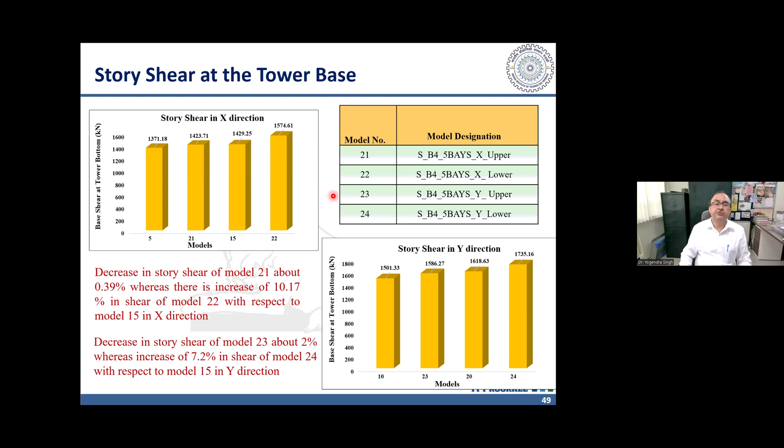Looking at the story shear at the base of the tower, it goes on increasing as the stiffness modifier is decreased. Model number 21 is upper bound, model 15, as shown in the previous table, was with 0.25, and model 22 is lower bound. In case of lower bound stiffness modifier, the base shear is higher; in case of upper bound modifier, the base shear is lesser. So the base shear gets affected, even in the tower portion, due to the lower bound and upper bound stiffnesses of the backstay. So we have to perform both analyses and consider whichever gives the larger forces.

Then the bending moment in the shear wall at the base of the tower, that is at the top of the basement, is also compared: this is the upper bound, this is the lower bound, and this is with our normal stiffness modifier of 0.25. This one is with the fixed base. We see that in the fixed base condition it gives the maximum, and here upper bound and lower bound are close. That much difference as we saw in base shear we don't see in the shear wall, because here it gets compensated. Same thing happens in the Y direction also.

Now we also tried to study the effect of soil, because in both these models we have not modeled soil, and soil is expected to provide some rigidity to our retaining walls. Some people may wonder why we ignored the soil. If soil is present along with the retaining wall, it will provide additional stiffness. But we also considered the base to be fixed, although we did not model the soil by the side of the basement. In a real structure, the soil will provide stiffness to the walls but flexibility to the base slab, since the base slab will also be flexible.

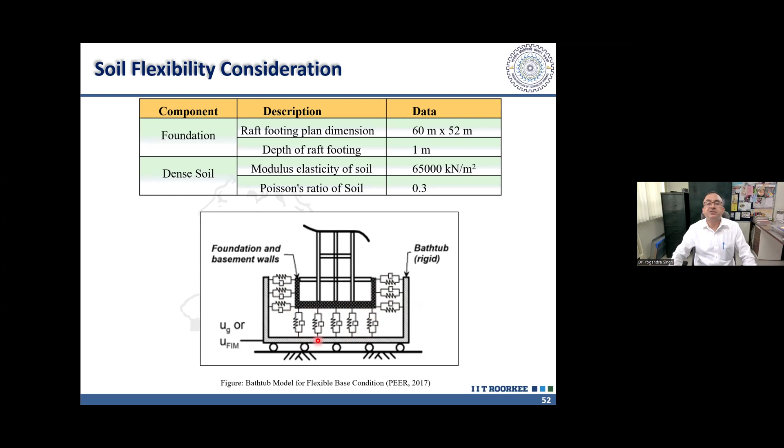So we made a model where we considered the stiffness of the soil at the base in all three directions, horizontal as well as vertical, and on the walls in the horizontal direction. These formulae are given in that draft code which we had circulated, and if anybody is interested, they can write an email and we will circulate it.

We have taken this from NEHRP guidelines, and these are the same as available in NEHRP guidelines. Using these, we can calculate the stiffness of the soil.

That stiffness of the soil was calculated and applied at the foundation slab as well as on the basement walls. With this, when the analysis was performed, the period of vibration with SSI, that means considering the soil flexibility, and without considering the soil flexibility, you can see the first mode period was 2.876 and 2.861. So this is not having much difference on the period of vibration.

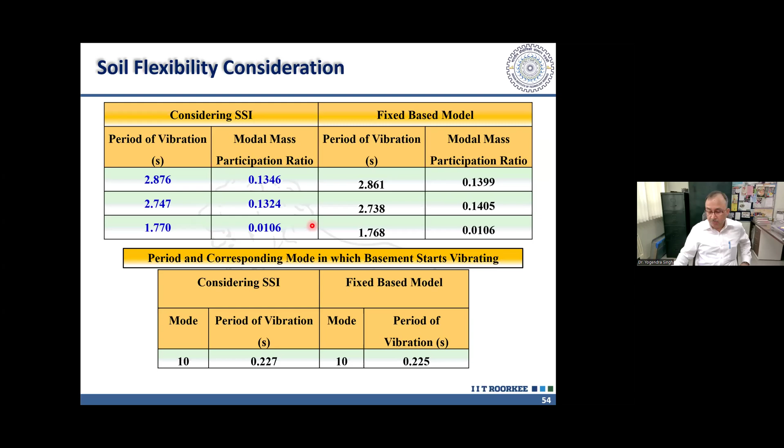Modal mass participation also varied only a little. So this effect of the soil is self-compensating, because when we make a model with fixed base and ignore the soil, we are compensating for the additional stiffness provided by the soil at the walls, and some flexibility provided at the base. So that model is adequate.

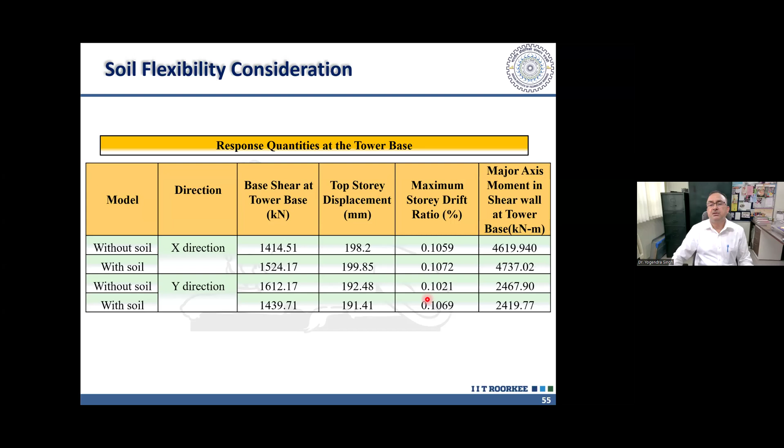The same thing is done for the base shear at the tower base and top displacement. We can see that the effect is nominal, so there is only an insignificant effect which we can ignore.

Now another problem which we face very frequently is infills. In India, we generally provide masonry infills, unreinforced masonry infills, and due to that, if those infills are provided uniformly throughout the height of the building, perhaps there is no irregularity. But if those infills are skipped in some stories, there is a possibility of irregularity.

We have to keep in mind that although infills provide a lot of stiffness and strength, those fail much earlier. So we did some experimental and numerical study to look at the behavior of the infills, and what effect those are going to have on our buildings.

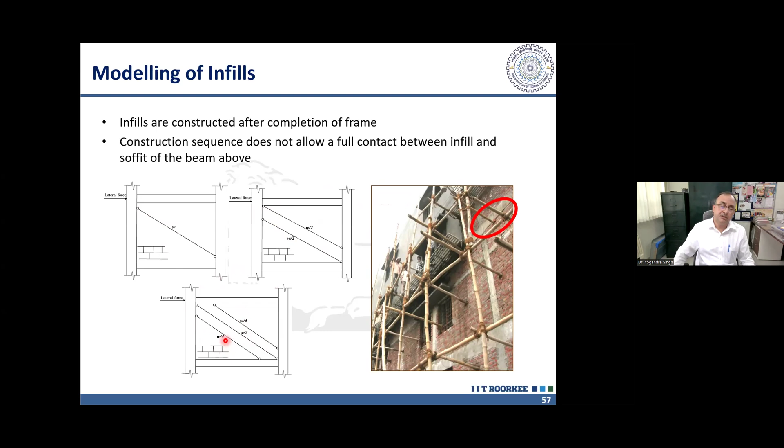Generally we provide infills after the frame is constructed, and different models are available in literature: either single strut model, double strut model, or triple strut, multi-strut models. We have used the single strut model for our analysis.

So one of the problems we have with these infills is that they can cause failure of the columns in shear. So columns need to be designed for extra shear.

So a 5-story building was designed as per code, but in our lab we could test only a single story frame. This frame was taken and analyzed for the full load of the 5-story building as per our code, keeping the strong column weak beam ratio.

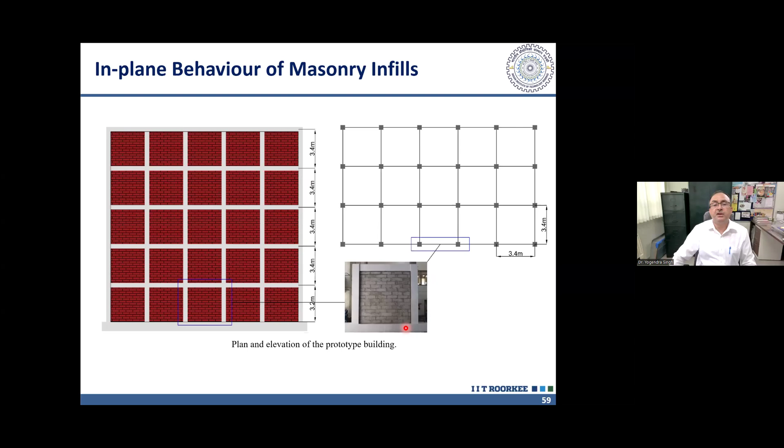This frame was cast in concrete in our lab and was provided with 3 types of infills. The detailing of the frame was done accordingly, with special detailing done at the joints, because we know these knee joints are very vulnerable.

Although in the actual building this type of joint was not there, because we were testing only a single story, these joints were a problem, and we did not want the failure to occur at these joints. So special reinforcement as per ACI 318 for knee joints was provided.

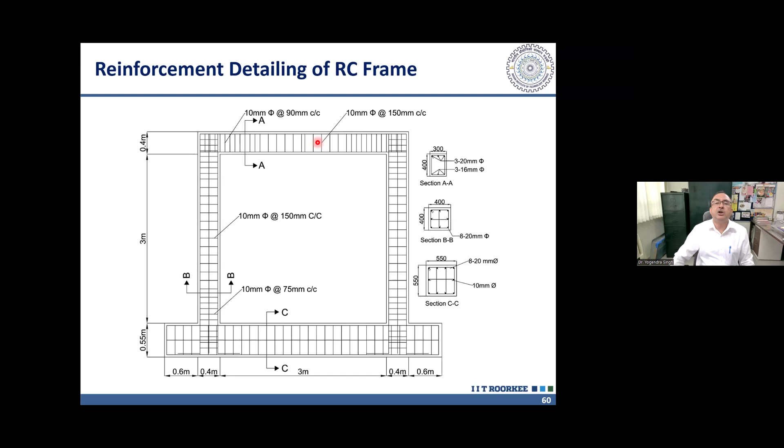The rest of the reinforcement in columns and beams was as obtained from analysis as per our code, so it represents a typical beam column frame of our code.

It was provided with 3 types of infills: normal burnt clay bricks, fly ash bricks, and AAC blocks. AAC blocks are lightweight and have less strength also. We tested 1 brick thick, 230 mm thick walls, and 200 mm thick walls with block, as well as half brick thick walls.

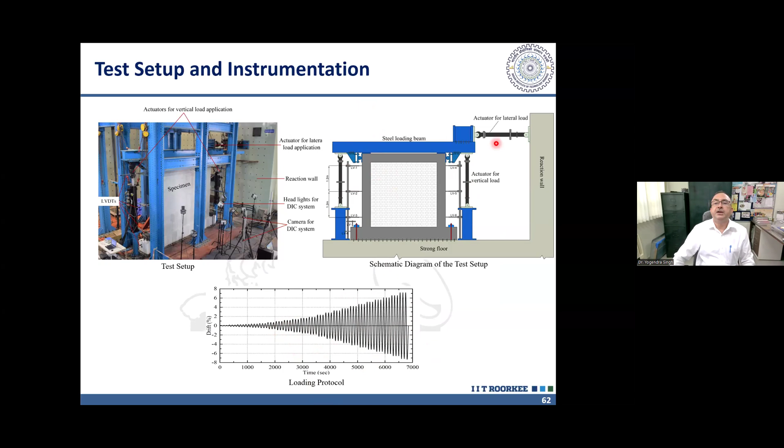What is seen is that initially the infills provide stiffness and strength, but as displacement increases, the infills fail and crack, losing their strength, and finally it is the bare frame alone. At the final point, close to failure, the strength is given by the bare frame alone, and infills have failed before that. The good news was that the strength did not reduce below the bare frame.

We also considered another type of infill which is coming nowadays, the EPS core sandwich infill, and that was also tested. In this panel, we have an EPS core with wire reinforcement, plastered from both sides, 35 mm on each side. This thermocol panel provides good insulation, and the plaster provides strength.

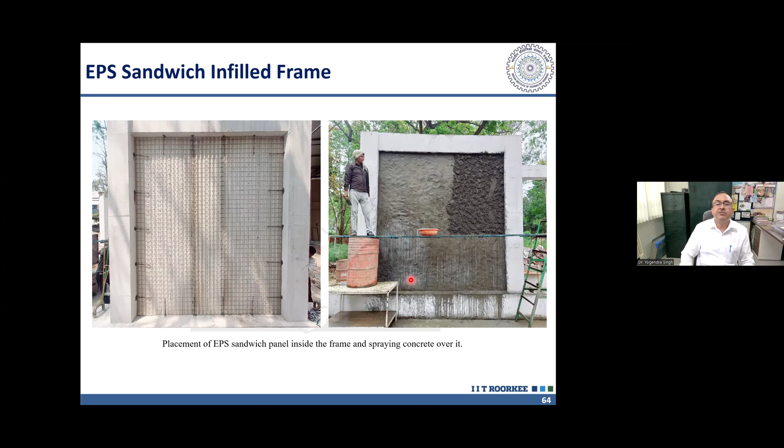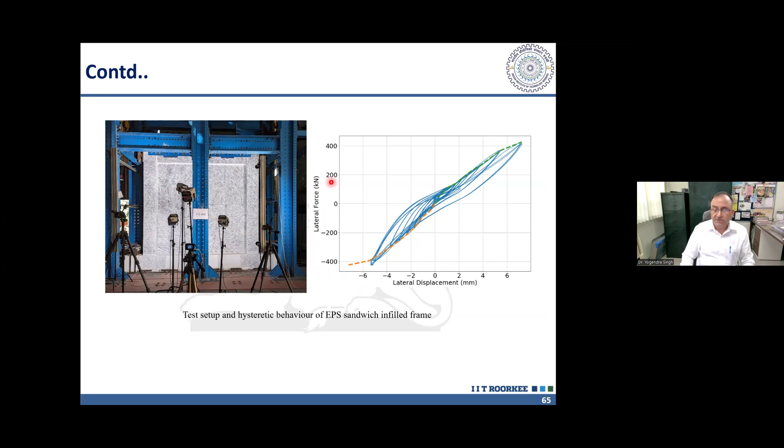We were surprised that it gave very large strength, and we actually could not fail it in our lab, so this experiment was incomplete. That's why I've shown it separately and not compared it, because we could not take it up to failure, and our actuator's capacity was exhausted. So we have kept the specimen and plan to test it later with a larger capacity system.

Now, what we have observed is that if a building is designed as per our code, failure of the beams and columns does not take place. What has been seen in past earthquakes, as I've shown you in photographs and in the lab, happened because of inadequate design of beams and columns. If we design these beams and columns adequately, we need not worry about the infills - infills will be taken care of if we are providing confining reinforcement. As per our code, maintaining a strong column weak beam ratio greater than 1.4, we need not worry about infills.

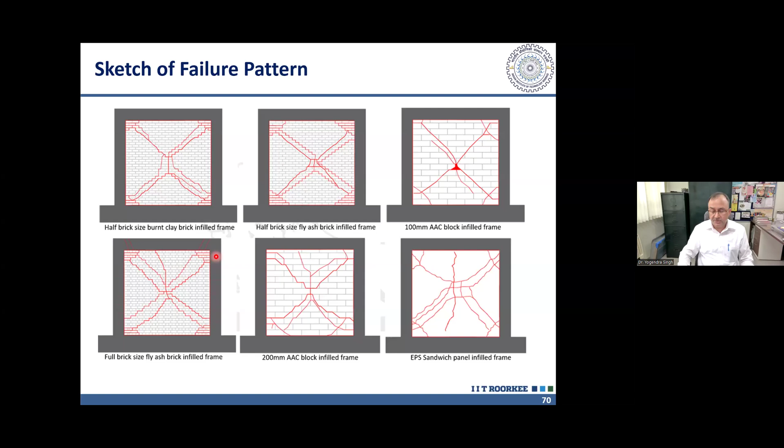Coming to other irregularities, one common issue given in our code concerns the modes of oscillation in the two principal plan directions. The code says the first three modes should have a contribution of not less than 65%, with a difference of 10% between successive modes. This is a big problem nowadays, especially for tall buildings. It's very difficult to get 65% mass participation in the first three modes and keep a 10% gap between successive modes.

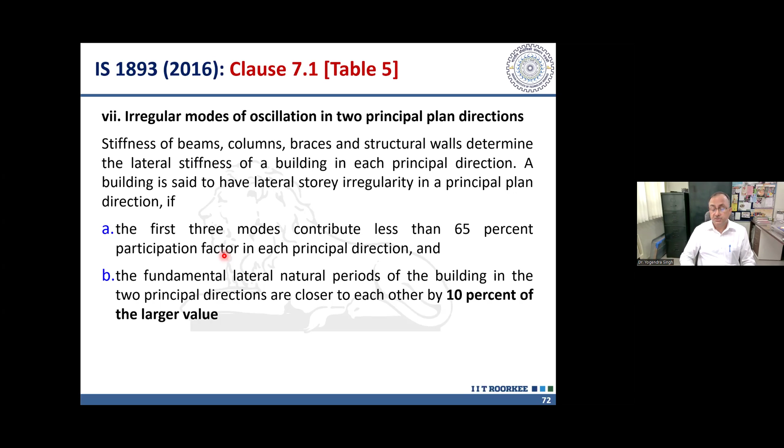So we performed an analysis because this type of provision is given only in our code. It is not there in any other code. So to see how important this is, we did a study.

We considered different types of buildings where the difference between the orthogonal directions was different. One building was square, with square columns too, so naturally the period in the two directions was the same, giving 0% difference. In another building, we oriented columns mostly in one direction, with perimeter columns distributed in two directions, giving a 5% difference. When all columns are in one direction, we get a 15% difference. In another building, the bay width in one direction is much smaller, so the stiffness is much larger compared to the other direction, giving a 40% difference. So we considered these four cases.

Then we considered taller buildings where shear walls are provided. In the first building, equal numbers of shear walls are oriented in the two directions, so the period difference is 0%. In another case, we had shear walls in one direction only, giving a 20% difference. Similarly, in the elongated direction we also get a 20% difference. Where the size of the shear walls is different, we again get a 20% difference.

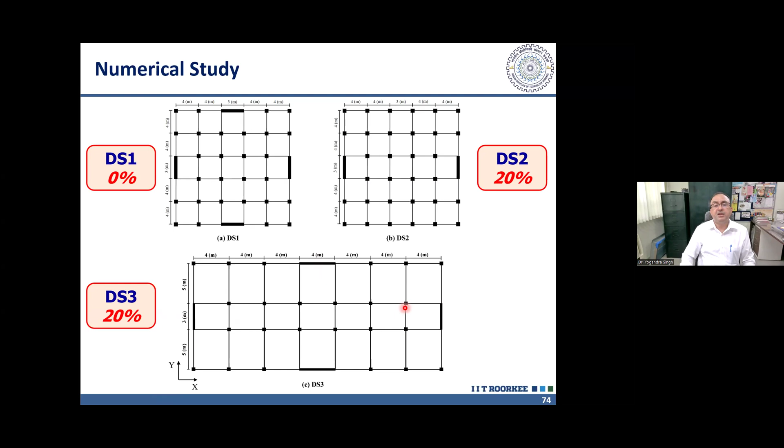So with these different combinations of differences, we performed nonlinear analysis. The code does not give any reason why there should be a 10% difference. In one piece of literature, Professor Murty mentioned that there may be coupling between the modes and a swapping of energy from one mode to another, which may happen in a coupled-mode building with torsional eccentricity. So we also considered buildings with torsional eccentricity.

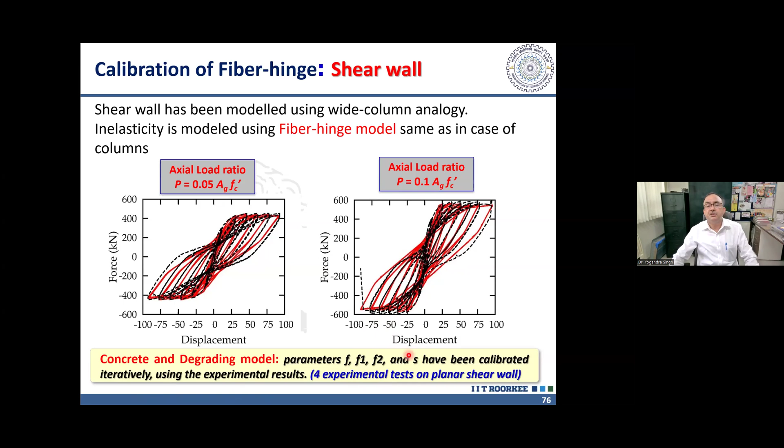For all these different types of models, we performed nonlinear analysis. Before that, we calibrated our nonlinear model with experimental results, especially for shear walls. In an earlier study we had calibrated models for beams and columns; here we calibrated the model for shear walls, since nonlinear modeling in ETABS or SAP requires certain factors. Using factors F1, F2, and S, we calibrated these models so that the shape of the hysteretic loop matches the experimental shape. We obtained these values iteratively and used them in our analysis.

We performed an incremental dynamic analysis and fragility analysis, and found there is not much difference in performance across all these buildings. The difference appears only when we are not considering accidental eccentricity. If we consider accidental eccentricity and design these buildings accordingly, regardless of whether the period difference is 0% or 40%, their performance is more or less the same, because they have been designed for the same response spectrum. So when we design for the same response spectrum, their estimated performance is very close—hardly any difference. In other words, the logic of these clauses in the code is not clear.

Why have those been provided? Because we did not see any swapping of energy or any problem with those buildings which have been designed with 0% difference. Bisymmetric buildings, we are calling them. The buildings are having the same period in the two directions.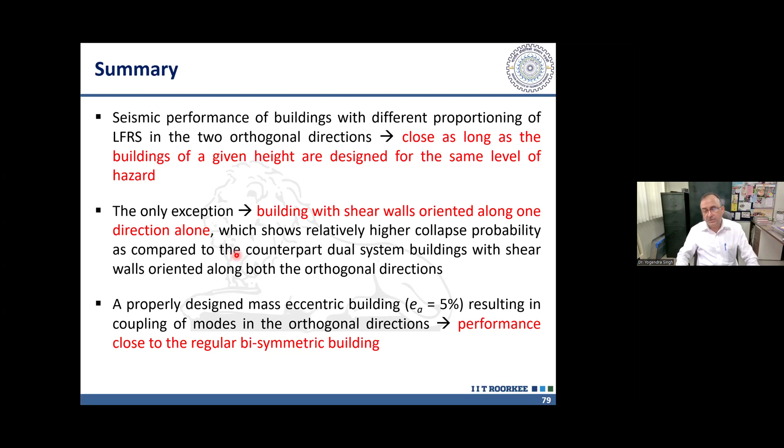And there is no such provision in any other code. But more studies are to be done. Some more people will do these studies, and then we can come to a consensus on whether this 10% difference clause is required or not. Till then, you have to go ahead with that and maintain that.

Then another type of irregularity which we have investigated is torsional irregularity. And in torsional irregularity, there are two issues. One is the eccentricity of mass and stiffness, which we call stiffness eccentricity.

So we can calculate the center of stiffness and center of mass. If center of stiffness and center of mass are not coinciding, then the building will have larger interstory drift, larger displacement on one side, which we call the flexible side, and on the other side it will have a smaller interstory drift, or stiffer side, which we can call the rigid side. Another issue is that the building may be perfectly symmetric.

so that the center of stiffness and center of mass are coinciding, but it may be torsionally flexible. Torsional flexibility means its torsional rigidity is smaller compared to its lateral stiffness, and that will be reflected by its torsional period. So if the torsional period of the building is longer than its lateral period, translational period in X or Y direction, then it is torsionally flexible.

The problem with a torsionally flexible building is that due to any reason, if there is a torsion applied, that torsion will get amplified significantly. So it will have a large torsional response even under a small torsional moment. So that is to be avoided. And different codes provide different guidelines for that.

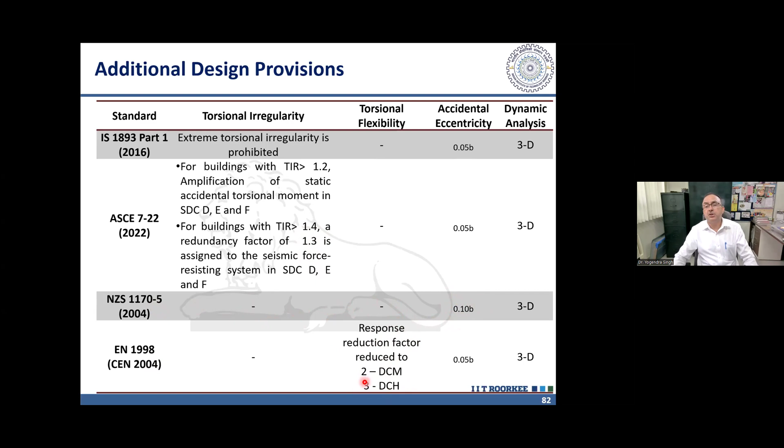It fixes the maximum response reduction factor for ductile buildings as 3. So from close to 5, it reduces it to 3. The accidental torsion is same as in ours.

Now, the revised code, which is in wide circulation, IS 1893, is yet to come, and we may be discussing it in some future talk. There, both torsional irregularity or eccentricity and flexibility are considered together.

A matrix is provided combining torsional eccentricity, that is eK by B. This Ek is nothing but the distance between center of stiffness and center of mass. And B, as we have been using earlier, is the dimension of the building perpendicular to the earthquake loading direction. So we use the ratio of eK by B, and T theta by Tx.

T theta is rotational period, Tx is the translational period in x direction, Ty is the translational period in y direction. T theta by Tx cannot be greater than 0.9, meaning at least 10% difference. So T theta has to be smaller by at least 10% than both Tx and Ty. So this maximum value is 0.9. Then depending upon how much eccentricity is present, this value of T theta by Tx is allowed.

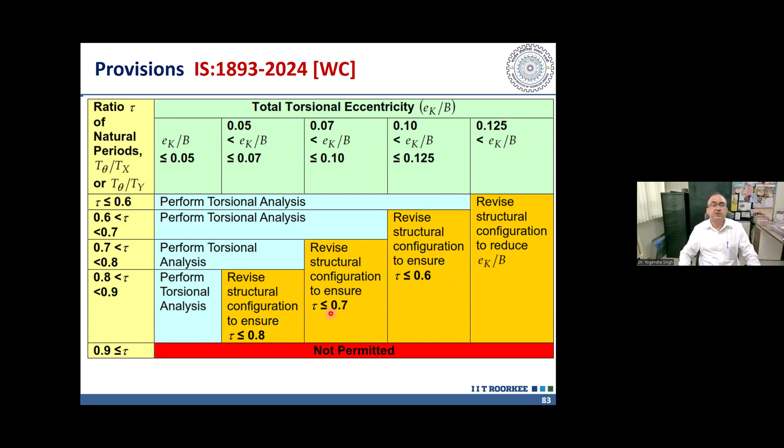We also did a study on torsionally irregular buildings. In one building, shear walls are provided along the perimeters, so it is torsionally rigid, and its torsional period is at least 10% less than the translational period.

With the same building configuration, keeping the number of shear walls same but shifting their location from the perimeter towards the center, this becomes a torsionally flexible model, but it is still symmetric, so eccentricity is not present.

This is torsionally irregular because one of the shear walls has been shifted from the perimeter, but it is still not torsionally flexible since other shear walls remain at the perimeter, so T theta is still less than 0.9 times Tx. This other case is torsionally irregular with irregularity in both directions, so eccentricity is present in both directions.

Now, if we look at the effect of torsional flexibility and irregularity...

Sir, do you want to take a short 5-minute break? It's already 2. I'm just finishing in less than 5 minutes.

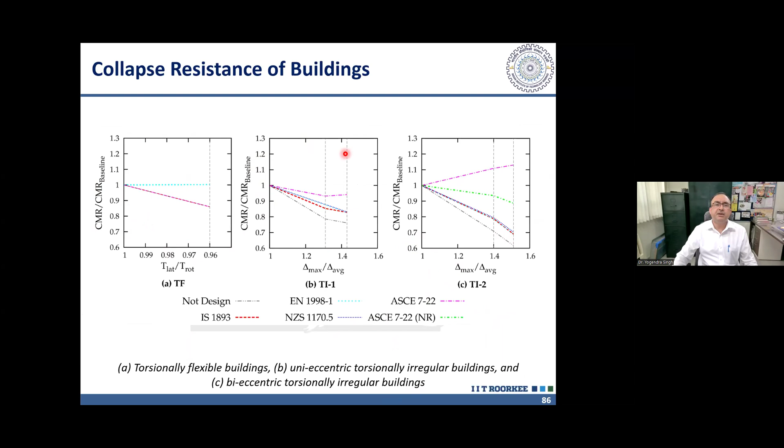I don't want to take you into these details, I just want to discuss the final outcome. Both torsional flexibility and torsional irregularity, that means eccentricity, are important, and when designing our buildings, we should take both into account. This revised code, through this matrix, will provide limits on both.

Last thing you may be interested in is this floating column. Many times we have to discontinue our columns, and different codes have different guidelines. Our code, New Zealand code, and Eurocode prohibit this, whereas American codes, ASCE 7, as well as the Turkish Building Earthquake Code, permit it.

So American code permits floating columns, but says that the structural members supporting that floating column should be designed for higher forces, and that higher force should be over-strength times. Those familiar with ASCE 7 know that tables are given where over-strength factors are specified, so the forces need to be increased by over-strength times.

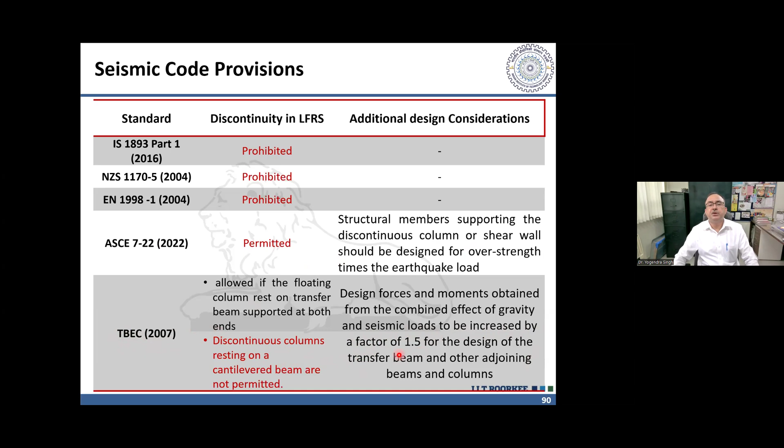Similarly, this Turkish Building Earthquake Code document also increases the forces, but by 1.5 times. So it says that you increase the forces by 1.5 times.

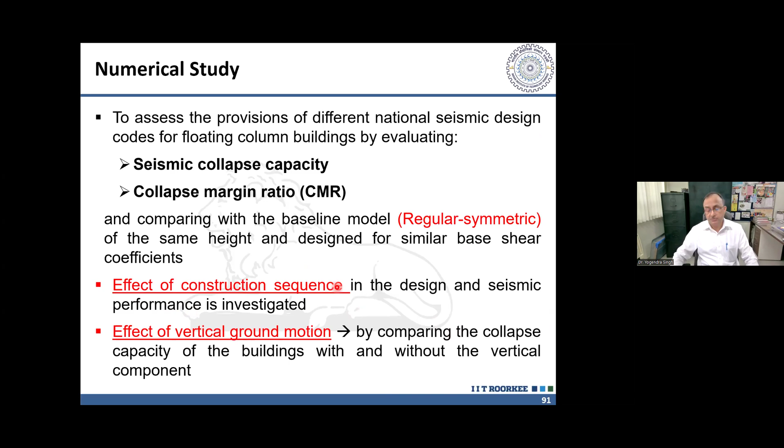Now, in case of floating columns, what we have observed is that the effect of construction sequence becomes very important. To illustrate that, there are four models we have considered here.

Then two studies were done. In one study, the columns in the ground story were removed. In another study, the columns in an intermediate story were removed. So floating columns starting from first floor, floating columns starting from an intermediate floor. Both studies were done, and nonlinear analysis was performed.

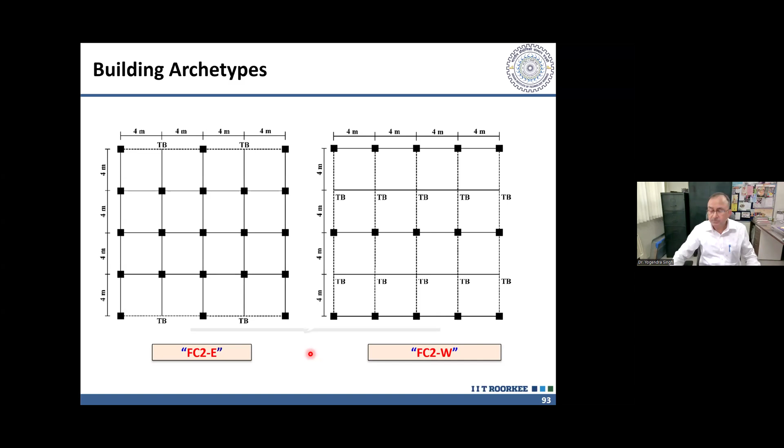I will skip that. The most important thing we discussed, which we found, was this construction sequence. Generally what we do is perform a simultaneous analysis, where we assume the whole building is constructed simultaneously. But in reality that does not happen, the building gets constructed sequentially. So we follow that sequence in analysis.

When we are applying the first floor load, only the single story is present to resist that. When we are applying the second floor load, then two stories are there, then three stories, and so on. So this is the sequential analysis.

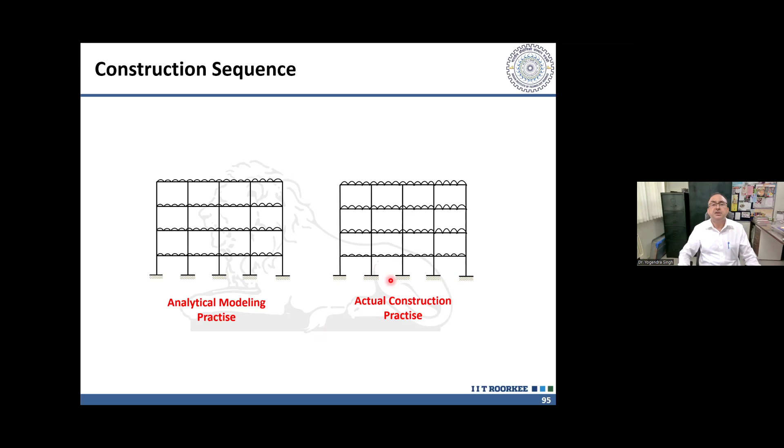But even in this two-story building, which is very small, if I remove a column and perform sequential analysis, you can see how much difference there is. This is 237, this is 444. So a huge difference, we are getting double the moment.

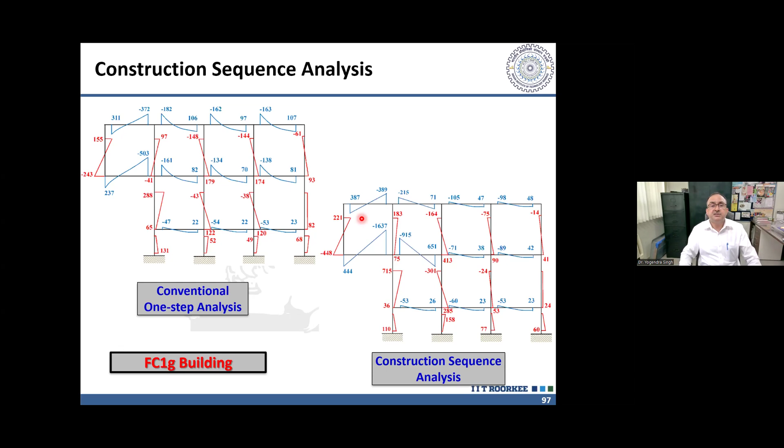So sequential analysis becomes very important when you have a floating column. Do not forget to do sequential analysis, even if your building is very short, very small, and has a floating column. Do perform sequential analysis. Otherwise, it is not earthquake -- it is the dead load and live load which will fail your columns.

This is the hinge pattern under earthquake loading. What we have seen is that if we properly design the building considering the code, even without increasing the load on the transfer girders by 1.5 times, if we design as per our code by following a strong column weak beam ratio of 1.4, we get the desired failure pattern even where we have floating columns.

So what was undesirable is that hinges should not form here in the beam, in this transfer beam. If the hinge was forming in the transfer beam, then this beam will collapse. But the hinge should form in the column. This is important: in the floating column, the hinge should form, because if the hinge is not forming in the floating column, the hinge will form in the transfer beam.

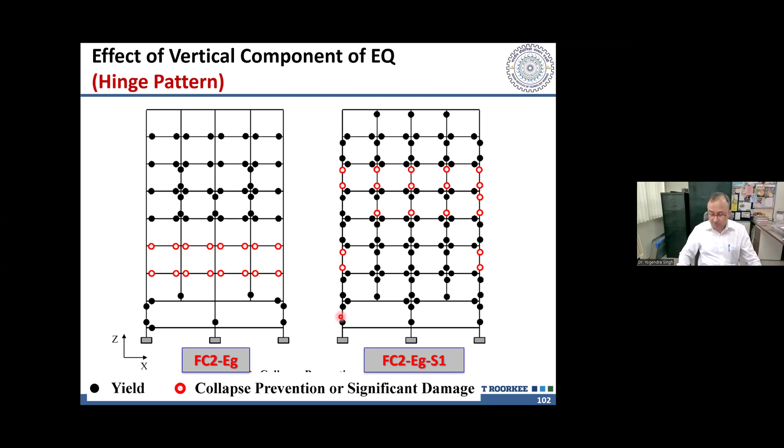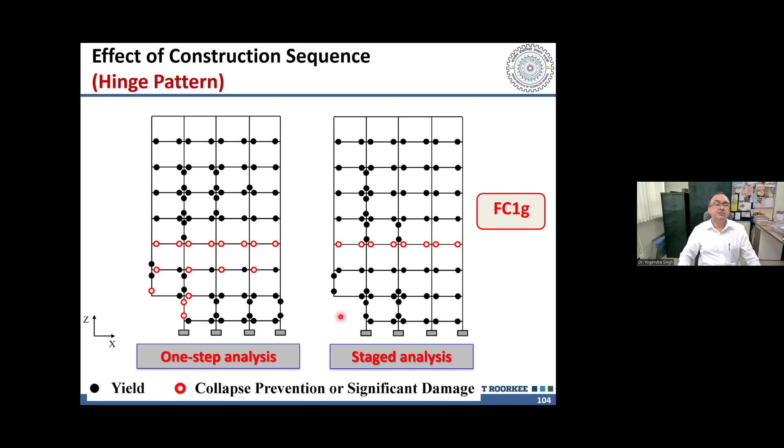So we can use floating columns, provided we are performing a sequential analysis and properly designing our transfer beams. It has been seen in all cases that it works fine if the collapse margin ratio is sufficient, and our building will be safe, provided—and I am underlining this—we follow construction sequence analysis. That is very, very important.

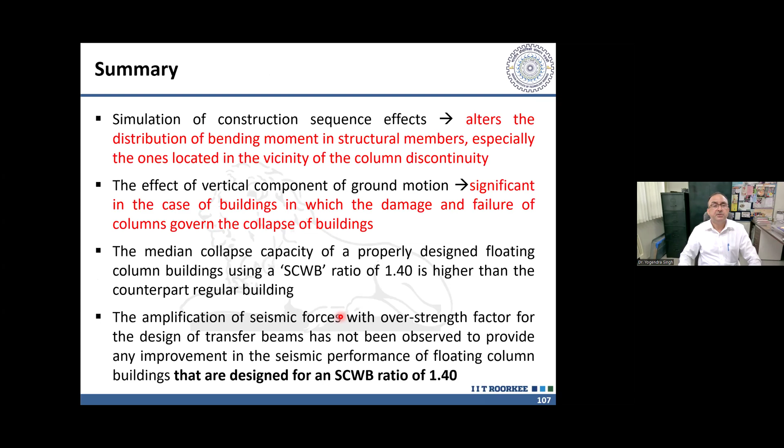Thank you, that's what I wanted to discuss in today's talk. Although I have taken a slightly longer time than originally planned, I have covered everything which I had planned. Many times I had to stop in between because of shortage of time, so thank you very much for being patient for these 2 hours and joining with me.